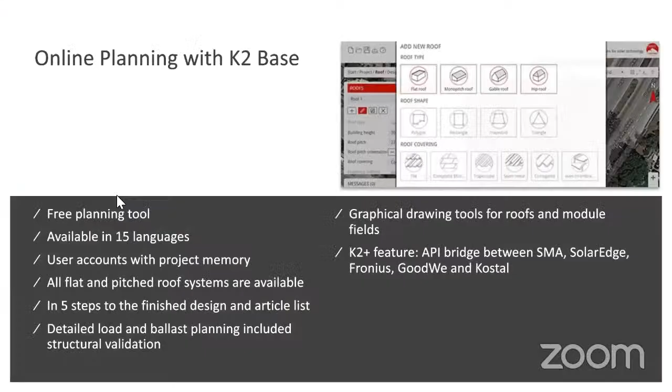Let me go back real quick. So I'll kick it over to David real quick here so he can give you some background on what GreenLancer offers.

Thanks, Nick. And thank you to everyone joining us today. GreenLancer, solar design and engineering made to order. That's what we're here to do. GreenLancer was founded to really accelerate the adoption of solar energy throughout the industry in total. Our mission is to make subcontracting solar permit design and engineering as simple and fast as possible for all the installers working on solar projects.

And how it works. GreenLancer is an online platform that allows solar installers to order permit design, engineering services, and other solar solutions from an on-demand network of providers, saving installers time and money. A quick run through: start by creating your account, creating a project within your GreenLancer account, browsing and ordering our fulfillment services, and then you'll have the ability to track and download all of your deliverables.

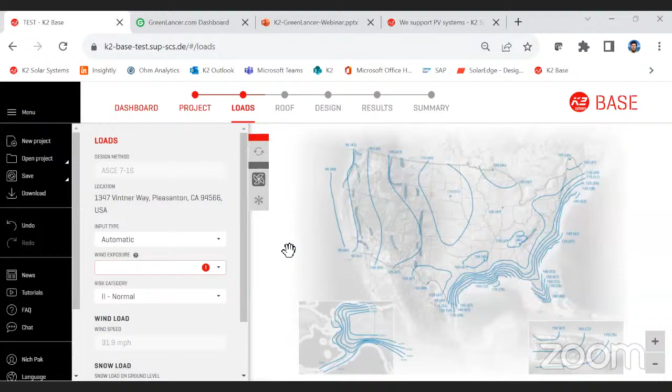This is the actual loading, wind conditions, and weather conditions that this array is going to encounter on this property. So it's letting me know it's analyzing if there's any snow in the territory. There's very little snow out here in Pleasanton, California—I think it snowed probably once in 1961 or something. The tool grabs weather information from the actual zip code, based on historical data. It knows the highest wind speeds in this area are about 91.9.

The one thing you do have to tell the tool is what kind of wind exposure this is. Is this house, where you're installing solar, out in an open field somewhere? Is it in a suburban dwelling with a lot of houses close to it? Is it near an open waterway? That gives you the classification of exposure, which in this particular instance is B. This is important information for David's side too—he needs to know where it is and what kind of wind exposure it's going to be.

After that, we're going to hit continue, and it takes us onto our next tab, which is roof. We're almost halfway to completing our project right now. So it's going to ask us while we're hovering over the property—let me zoom in a little further, just give it a second to zoom on in.

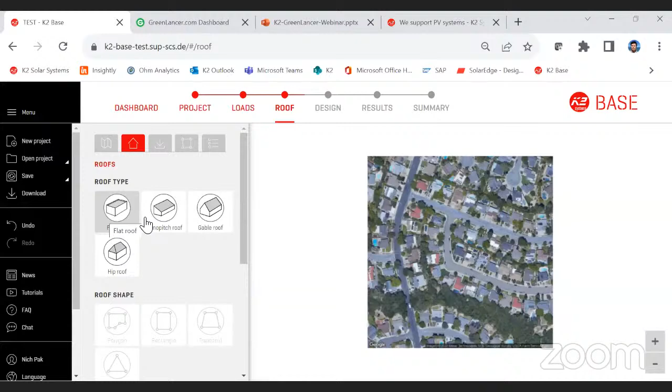It's going to ask me what type of roof we're doing here today. Are we doing a hipped roof? Are we doing a monoslope? Is it a very low pitch, almost flat roof? This is actually going to be a gabled roof. Let me zoom in here to the house a bit further—so this is definitely a 2-story house with a pool, and it's got to have an air conditioner.

Sorry about that, I was receiving a call from a family member and I thought it was on Do Not Disturb. Can you guys still hear me? Loud and clear. Great, sorry.

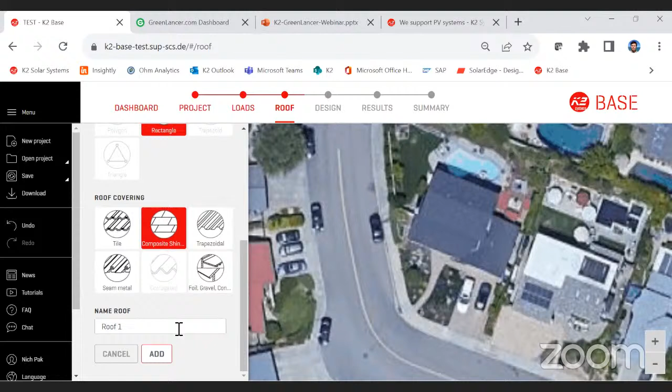Since it's a gabled roof, it asks would you like to design in the shape of a rectangle—what type of geometry are we going to put over the roof so we can fit solar panels into that? Let's go ahead and select rectangle, and then it asks what roofing material this is. Is this a tile roof? Is it a metal roof, a standing seam? Is it gravel or concrete or some kind of rolled material? This particular house is, of course, comp shingle. I think about 80% of all residential installs in the nation are probably composition shingle.

Is that what you're predominantly encountering, David? Yeah, that's what we see mostly. Yeah, it's definitely the most popular.

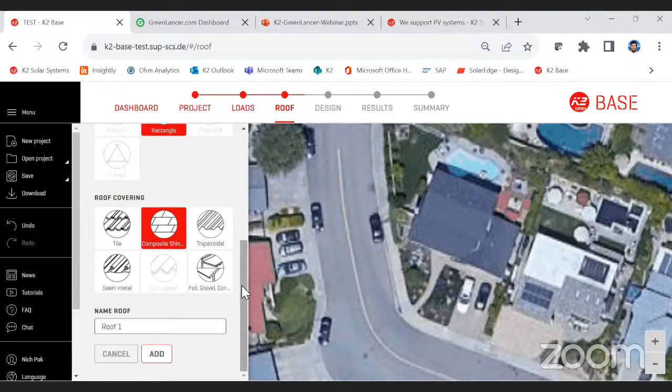I have the ability to classify what roof we're actually designing on, because we can design on multiple roofs with base. We can design on the southwest side of the house, or the southeast side. If you really want to, you can design on the north side of the house—don't recommend it, but we've had requests. So this one I'm going to title Roof 1, second floor. This way David will know which roof we're actually designing on, and he's going to get a comprehensive package of all this information over at GreenLancer.

Now you'll notice this portion of the menu has turned white, with no more selectables over here. But when I move over here, my cursor has turned into a crosshair—this means it's time to draw across the roof. So I'm going to click on the far west side of the house here, working from left to right, and I have inline dimensions ready for me. This is going to be about a 38-foot roof—we can just be right over that at 38, and then about 16 in depth.

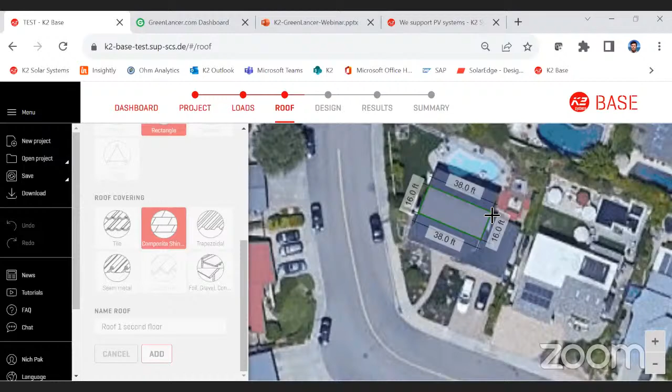There we go, and we can even zoom in further if we need to. It's going to ask me if I know the building's height. I do, it's not going to make any assumptions.

You can tell it that it's 34 feet, or you can say that it's 30 feet.

It's going to ask us what is the actual inclination of the roof, or the roof pitch. Most composition shingle roofs we encounter are in the range of about 22 to 26 degrees, so we're going to go with the higher one and say it's 26 degrees.

It does classify that the roof covering is composition shingle, and the rafter spacing here in the United States, mostly in the Northwest, is 24 inches on center. For folks on the East Coast, you probably encounter more like 16 inches on center because of more snow loading and different pitches out there. But in this particular instance here in the Northwest, we're going to see that it's 24 inches on center.

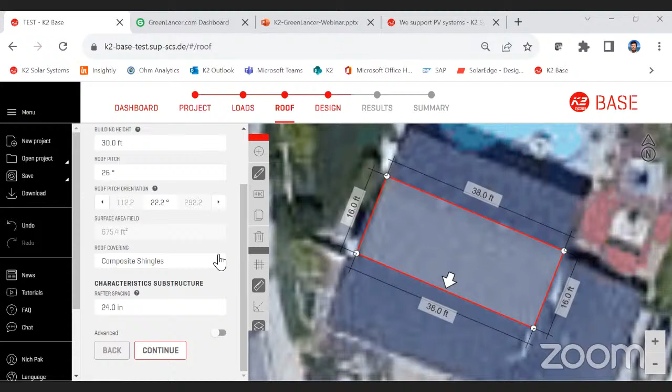So from that portion, you can see this roof portion is just about finished. It's going to lead us on to design very soon, so I'm going to click continue.

It's just giving me some other weather information right here at this last portion of roof, and this is where you can toggle through the separate roofs that you have. We're going to go ahead and hit continue here.

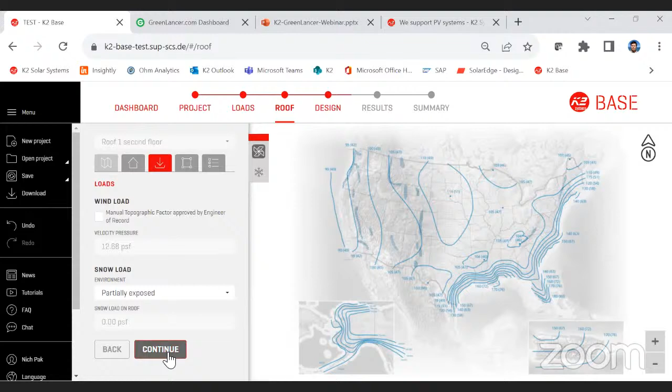We know that the environment is partially exposed. From here, if there are any obstacles like a chimney, a skylight, or roofing vents on the roof, you can stipulate that here, and you can even draw the size of it. That'll show up in the GreenLancer report as well, noting there's an obstruction and its size. We're not going to do that today because we've got a pretty wide open roof for this property.

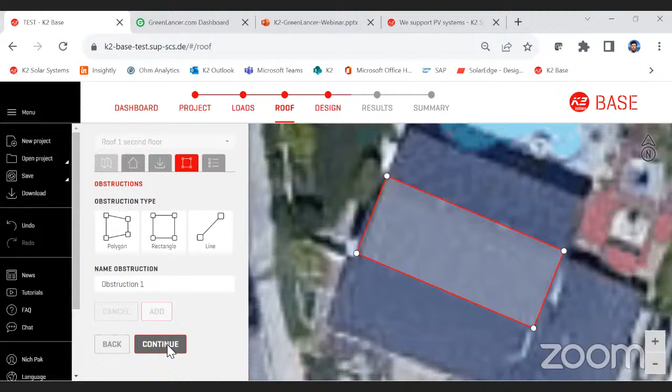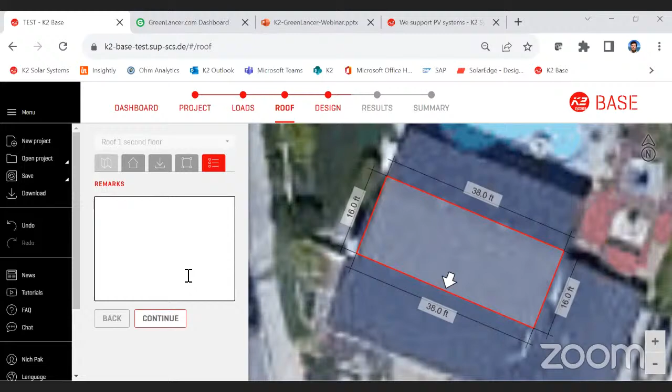I'm going to click continue. Any additional remarks about the roof? You can even put in here that the roof was re-roofed back in 2012, or re-roofed recently in 2019, if that information is available to you, you can place it right here.

From here, we're going to go ahead and select from our menu of modules that we have. We're going to go with the last module I used for my projects, which was REC, but we do have a vast menu of modules you can select from. It looks like the last one I used was the Alpha 360 Black. This will also give you the information on the module, its length, its width, its actual weight, and its power output. The power output will be calculated at the end.

It'll show you how many modules you have on that roof, and that's it for selecting modules. If you want to choose another manufacturer, just type it in - you want to select Solaria, you can select Solaria. We have a vast menu of different modules and manufacturers, which our compliance team is constantly adding to in this platform.

We're going to go ahead and click on continue. Then it's going to ask us, okay, we're finally down to system design - what type of system do you want on this? Do you want to use a standard 2-rail system where we put 2 rails under the solar panels across, or do you want to try our shared rail application as well?

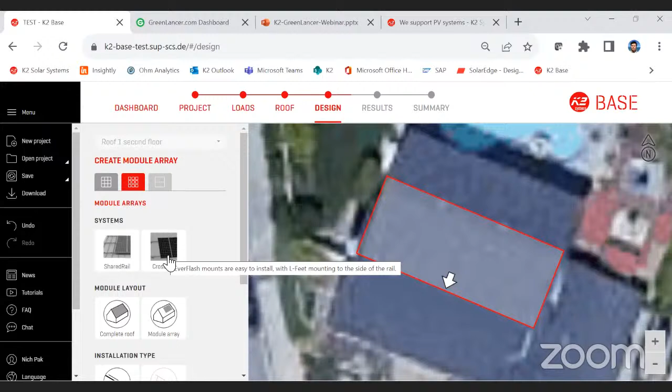For this particular practice, we're going to use the tried and true 2-rail system, where we put 2 rails horizontally across the roof and put modules across those 2 rails. But our system with Crossrail does offer a shared rail application as well. Please reach out to us if you have questions about how that's executed, and we can show you how it's done. We have more training videos coming with more comprehensive training about the shared rail process. For today's demo, we're just going to select standard Crossrail, since I think most installers and designers already understand that process.

It's going to ask me, would you like to just fill up this complete square, or would you like to draw across it? So I'll select module array layout. And what orientation would we like these modules in? I would like them in portrait.

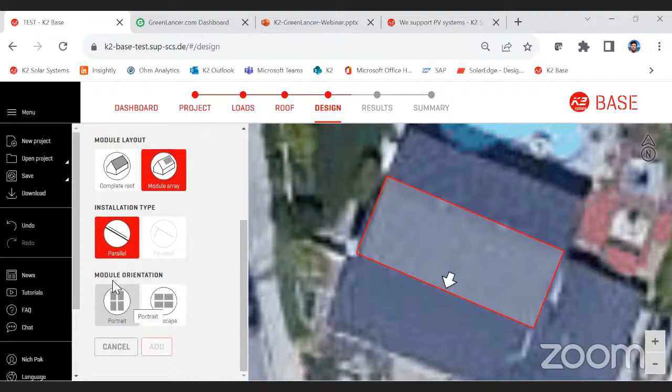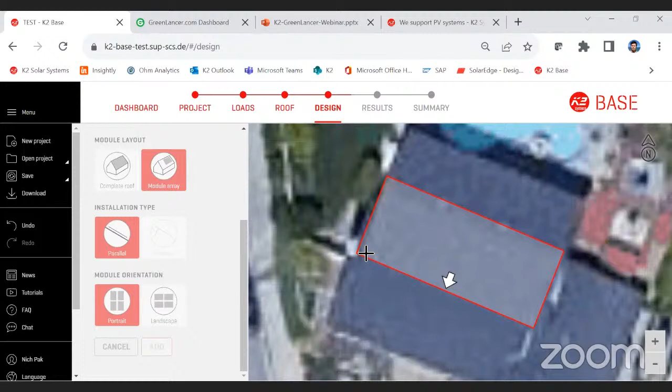Now from here, you'll notice the menu's gone white, and my cursor has turned into a crosshair. From here, I'm going to click from left to right and draw across the roof. This also gives me inline dimensions as I'm drawing.

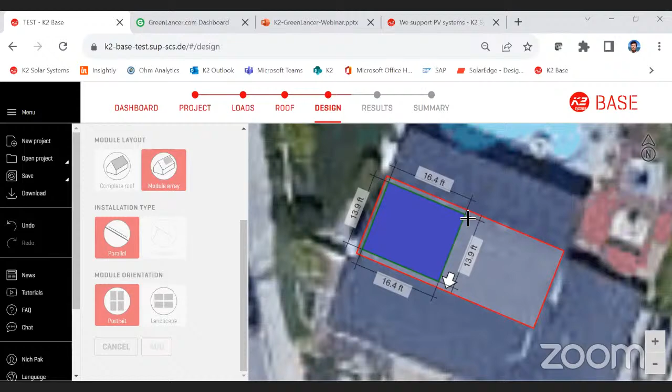So I can draw a column or a square over here, and it'll drop modules into that square. Or I can edit it and draw it all the way across, and it'll continually lay down modules as I expand that field. I'll show you right here how it's done. It's very simple, very plug and play.

It looks like we were able to get 20 modules up on that roof, a 7.2 kW system across this entire house, with plenty of room for setback. That's actually what your yellow line is here—it's an 18-inch setback all the way across the roof. So it fits right in that 38 by 16 roof. It's telling us how many modules we have up the roof, which is 2, and then 10 across.

From here, in this menu, you can select what type of clamps you'd like—our standard top-down clamps, or our Yeti hidden clamp. This particular client didn't want to see any of the hardware sticking out of the side, so he wanted the Yeti clamp. And since we're using black modules, we're going to make sure we use black mid clamps in between them.

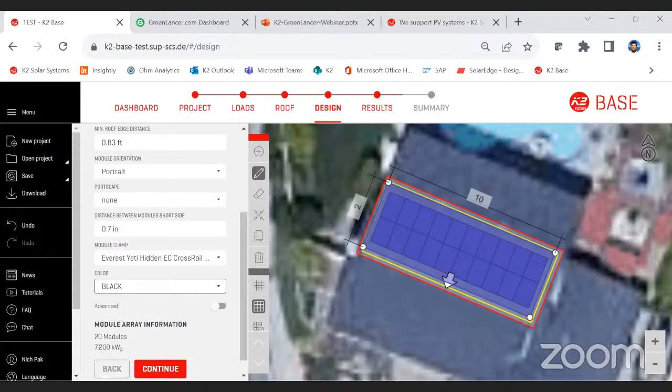From there, I'll click continue. We're on to our last two segments of designing this, and we're able to transfer over to the results tab. Since we've told the tool that it's a 24-inch on-center roof or rafter arrangement, it'll line this up with the rafter arrangement and place your mounts in between these areas.

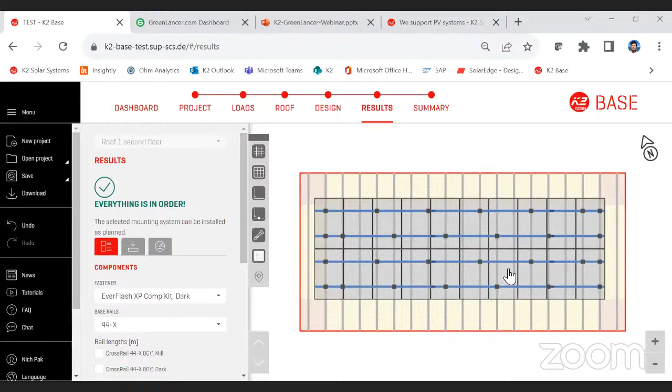So it gives you a readout on the actual array itself. We can select from our menu of different roof attachments—we have our E-comp series, our XP comp, and a standard L-foot. Let's say you're using somebody else's roof attachment today and want to use the K2 L-foot only. You can do that in this menu.

If we change it to a third-party roof attachment, you do have to consult with the manufacturer, because our tool would immediately recalculate for only 4 foot on center, since we don't know the capacities of that third party.

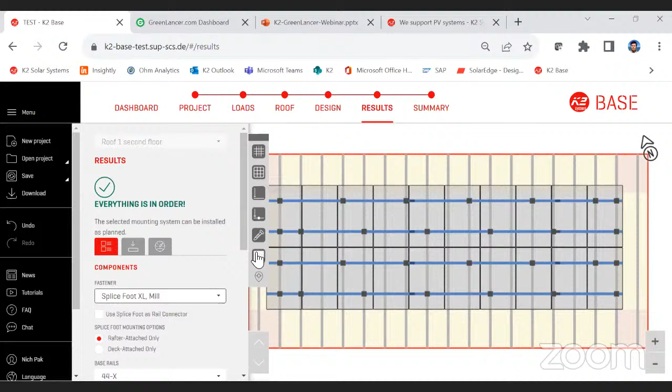But the one thing I'm excited about is we're going to choose the SpliceFoot XL. This is our brand new direct-to-comp and deck option roof attachment. It's compact, installs rapidly, and you don't have to break the shingle line like you do with traditional metal flashings. It's very fast and simple to install, and gives you the flexibility of joining the rail together in the field as a splice.

With that said, you can choose from an abundance of different configurations with the SpliceFoot here. You can use it as a rail connector, or as deck-attached only. For this particular issue, I'm going to use rafter attach only.

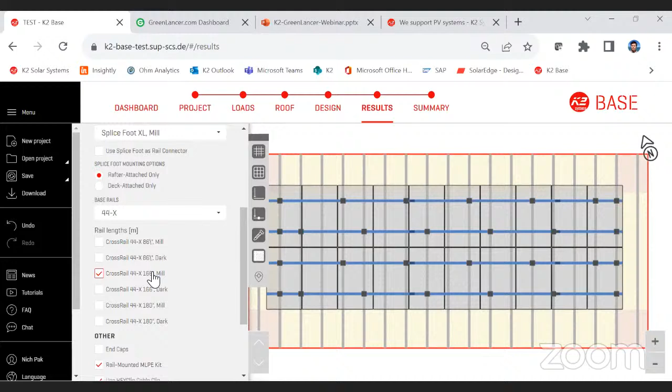I'm also going to select the rail I want to use out of this menu. I'd like to use our lighter gauge, but not lighter in duty, 44X in mill finish, since we're using black clamps on top. And I'll make sure there are good end caps on that rail, so no debris or critters try to get inside the racking.

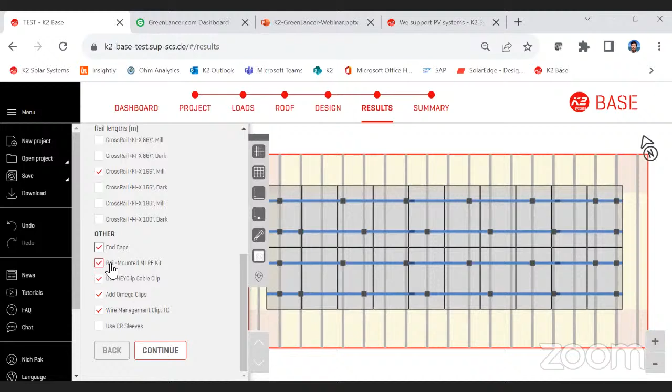From here we can choose our wire management. We definitely want a rail-mounted MLPE kit, which is great for microinverters and power optimizers. From there, I'll click continue.

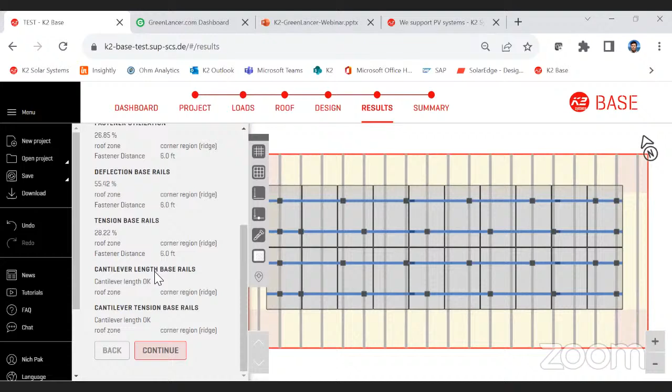It's letting me know that it's analyzed everything we've drawn up today, and we should be in good order. It gives a breakdown of some of the cantilevers, and this is all packed into your engineering report as well.

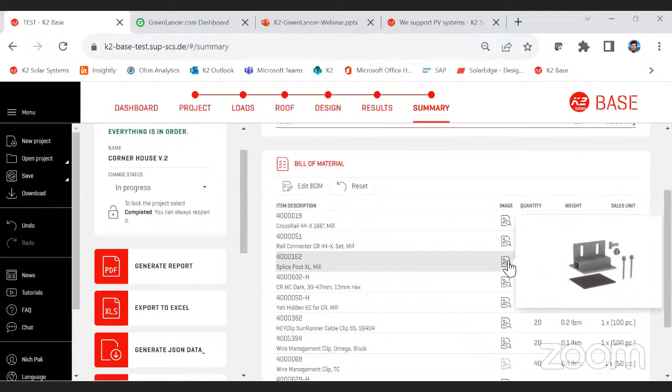If you're not familiar with what we offer, this is our Crossrail 44. This is the rail connector that goes in between. And this is the SpliceFoot XL with the integrated butyl water barrier built into the mount.

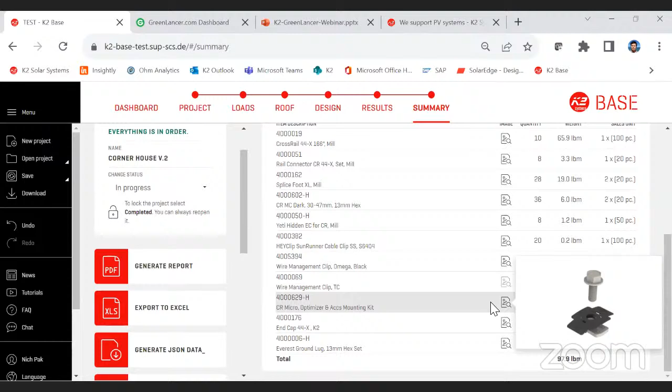This will show you the mid clamps. All of the imagery is here, so if you're unfamiliar with the product, you can hover over it and get a better understanding of what it looks like. We've upgraded our MLPE hardware kit to be a single bolt, and this is all part of a single tool install.

So you should only need one socket for this entire BOM for all of the structural attaching of the modules and the rail together. You will need a separate socket for putting in the screws for SpliceFoot because they are a different size. But everything else you'll need to attach rail, the T-bolts that attach to the rail, the Yeti clamp, and all of your module and rail attachment will be a single 13mm hex. So that's that portion of the BOM.

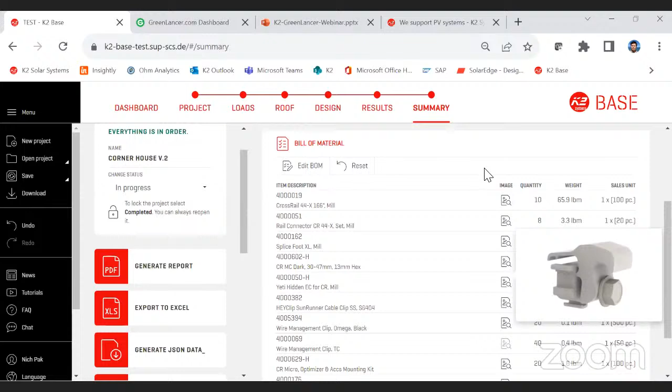Here's our kilowatt target, and I'll be able to hand it over to you right now, David, because we're going to go through our menu of API bridges here.

Standard report, where you can actually download this entire system, everything you drew up. It gives you an assembly plan, project data. It even gives you the length to cut the rail, so you can know exactly how long you need to cut it. It gives you the actual readout of that. We've packed a lot into this report, and we'll go over that later.

If you guys want me to send you this report, I'll go ahead and just download it. And then after that downloads, we'll go over to the other buttons we offer here. Last but not least, we have our software design button, which allows us to go over to SolarEdge and different APIs with K2+.

And then let's get this over to David. We're going to click the GreenLancer API button. Let's get this over real quick. It's noticed that I do have a login for GreenLancer. So if you don't have one, you need to make sure that you do. I also recommend having your GreenLancer account up on your browser. It's helpful, not required, but helpful to have.

If I hit login, it's going to recognize the project. And then from here, it's going to ask me what I'd like to have. Let's go over a couple of these real quick, David, and then I'll request one.

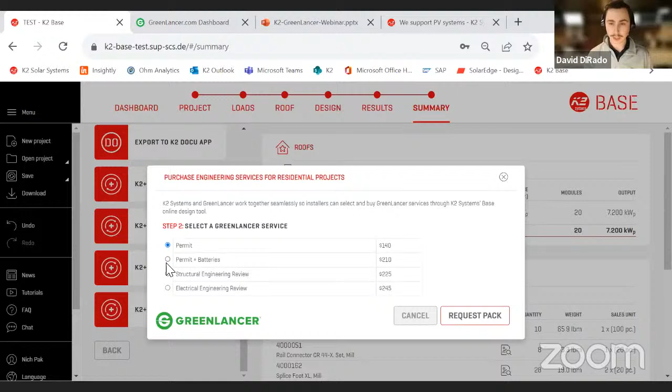Starting at the top, the permit—that would be your common permit plan set with all the structural and electrical sheets, spec sheets at the back of the full plan set. Permit plus batteries—we separate a traditional solar PV system from solar PV and batteries or storage. So that's where you'd get your PV plus storage permit plan set.

Going down into structural engineering, all of our engineers are licensed in any state that you're working in. So we're never going to hook you up with an unlicensed engineer. That would just be for structural engineering review, getting your structural stamps, and then on to electrical engineering review and getting those electrical stamps.

For this sake right here, to send this project on over to you, I'm going to go to request permit pack. And that will open up into GreenLancer, and I'll hand it on over to you. All right, that is sending its way over to our platform. I'll take over here, Nick.

Excellent, excellent. Thank you for the demo. Anytime I see the base program, man, it looks easier and easier to use. It's really amazing what you all were able to do. We appreciate that. Go ahead and take over, it's on to you, David.

All right, and everyone see my screen okay? We can see it, you're good. Okay, so we could see that project that Nick was just creating inside base.

It made its way over to our platform, the GreenLancer application, corner house V2. Right here, we could see that one quote Nick created, the $140 permit plan set service. As you see, I'm inside this project within your account. So if I went back to projects, I can easily come back and click inside that project. I have my quote sitting right there.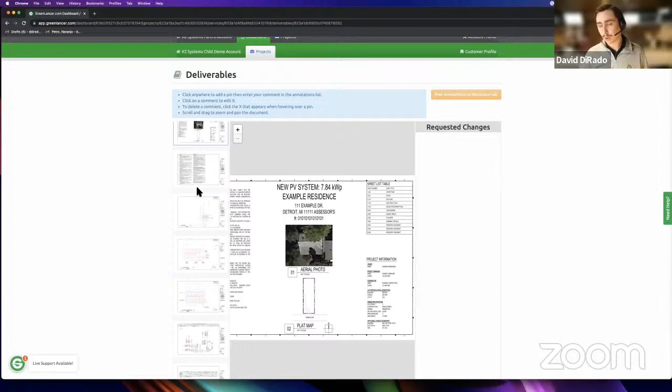One more cool tool that we have is right here - this would be your final deliverable. I can download it right here, or if a few things are maybe off, I can hit that eyeball, and this opens up our annotation tool. Let me zoom in a little bit here. So you can see on the left-hand side, this is a completed permit package, showing all the pages within this full permit plan set. And let's say on the site plan, I'll zoom in a little bit.

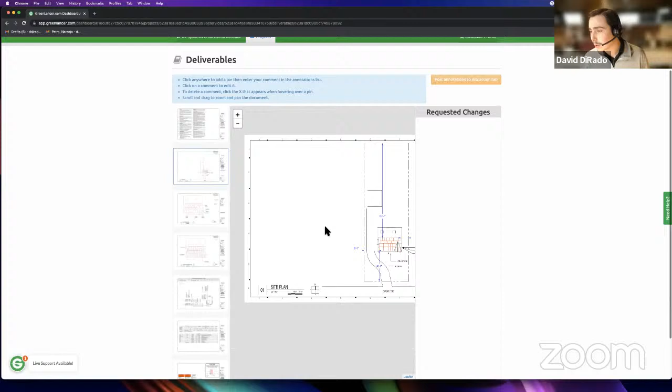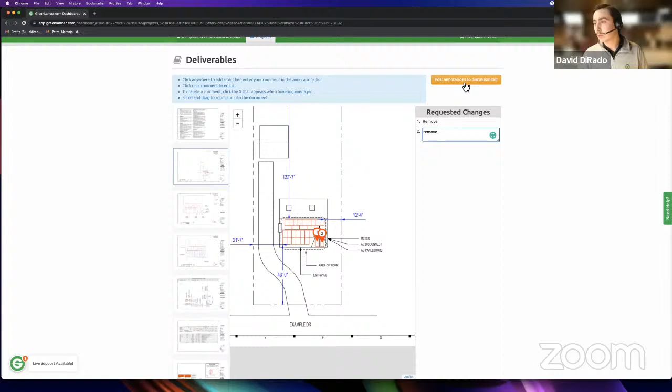All right, let's say I wanted to get rid of these two little modules - they're kind of out in the middle of nowhere. The homeowner didn't really like them sitting there, so we want to remove them. What you can simply do is click wherever you want. I'll click right on that module, drop a pin, and then write a corresponding message with that pin. And this one too - so I dropped two pins on the two modules I want to get out of this design. Now what I'm going to do is post annotations to the discussion tab, which builds your annotations and saves it.

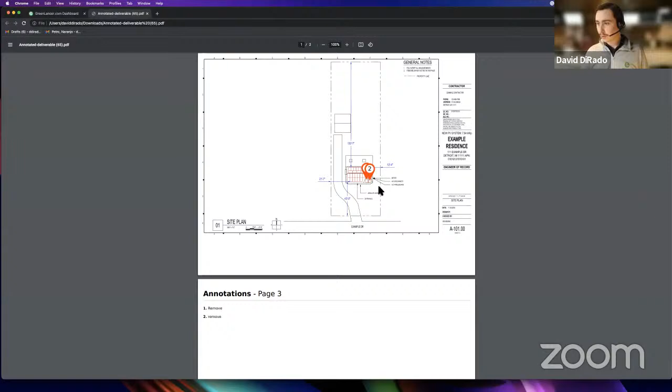Now, if I scroll down, you can see that I just left this comment, this annotation, for the designer on the other end. If I click on the annotation, it opens up, and you can see there it is. So it's a good way to get quick red lines out. If you want a few things changed, the homeowner didn't like the look of something, it's a really easy and simple way to get changes out to those working on the project.

So that would be a completed project. I showed you where that quote would come from the base program, right here, ready to go. And then, of course, if you want to add anything, you just click into that quote.

And then really quickly, just a few housekeeping things. The information, you could save all that so it populates. And then right on the other side, company, we can add your logo, customize your permit plan sets to your company every time.

And then we can set email notifications. So any accounting emails, we can make sure those go to your accounting department. If one person in your company needs to know when permits are back, we can set that notification. So when any work is completed, one individual or multiple will get an email notification that this project has been returned, and comment emails as well. A lot of times it's good for a project manager to have their email in here so they're aware and get alerted anytime a fulfilling partner reaches out on their work. We can customize that quite a bit.

Then users. We can always add users, delete users, and this is where we would add anybody new to the account that we wanted to.

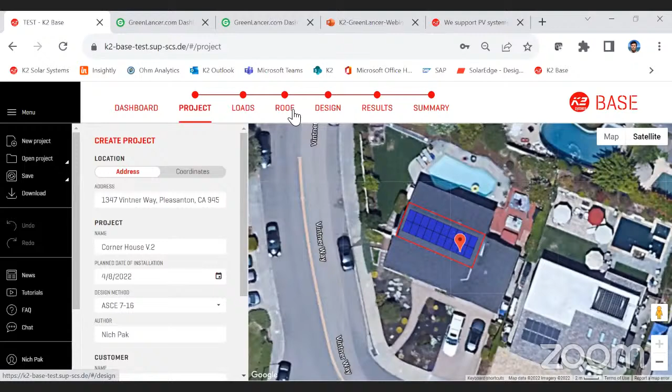Let me go to this project real quick, and I'll go back to the dashboard, and show you guys how to share a project. So here's our project that we were working on. Let's say for some reason I was stuck on the roof aspect or something like that. If I wanted support with this project, I would just click download, and I could share the project after downloading it. There's my file right there.

And I could go to our chat and get a hold of somebody via iMessage or WhatsApp. I could send them the file and say, hey, I'm confused on how to add another roof to this, how do I change the direction of the roof? We're able to respond very rapidly if you send us the project you're actually working on, or we can easily jump on a video meeting to get you supported.

That, and the autosave, and ASCE 7-16, and the API bridge we have with David and Jay at GreenLancer, are the four updates we wanted to show you guys, predominantly the GreenLancer partnership that we have. We're excited for it. Dave, thanks for driving through some of those features. I think let's open it up for some of the questions we have chatted in so far.

Yes, we have a few questions in here already. I'll start off with, how are the service levels different from GreenLancer and GreenLancer through K2?

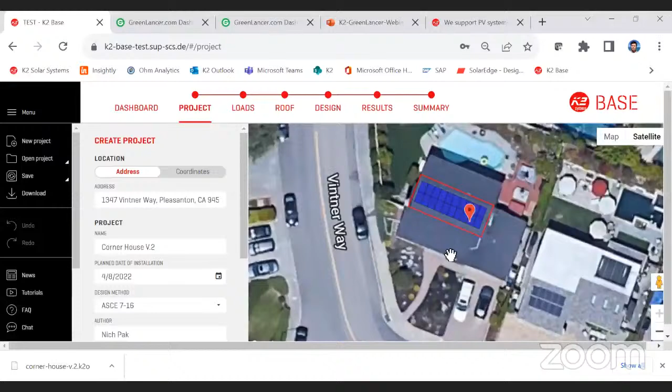Perfect. And then just piggybacking off of that, they also asked, is there any additional revision fee, or is it all included in the 140 price point?

That's a good question. So with the 140, I'll say this overall for any of our designs: if you get rejected at the AHJ level and they give you a rejection letter or any email feedback, we're never going to charge you to correct our work. That's just not right at the end of the day. Now, you may see a change order if we do a full design and then we're going to move that full rooftop system to the back garage - it's a pretty big change on the design side, so we might have a change order. But overall, if your permit ever gets rejected, we would never even think about charging you for us to update our work.

Revision fees are not something that we like to send out. We want to support our installers. So what do we have to do? Get you that support - that's what we strive for.

Perfect. And then Matthew asked, how do the setbacks work if you only need a setback along the ridge, or for flat roof NYC projects where the location of the 6-foot fire pathways can vary greatly? 6-foot fire pathways - wow, interesting.

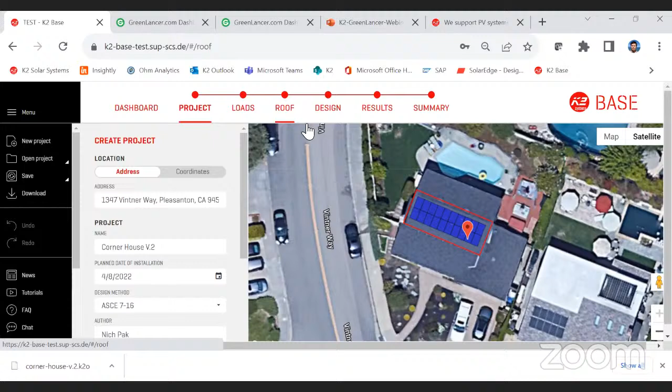So the easiest way to combat that is honestly just take the roof and place it where you need to place it. So you can modify this yellow line right here if you need to. But if I did know that I had a 6-foot setback, I would just change the dimensions of my roof that I'm trying to install on.

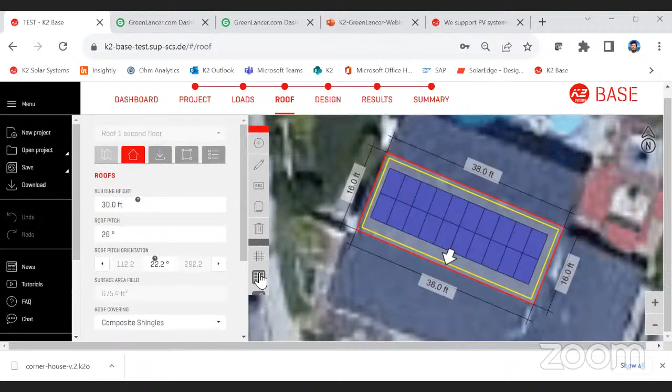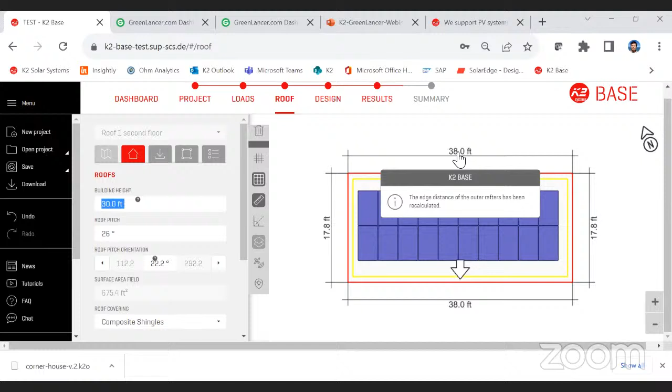Hopefully that answers your question. So I know that there can be a lot of complexities with roofs, and the design we're looking at right now is very rudimentary and easy to design. But the more complex that roofs are, especially with 6-foot setbacks, the easiest way to navigate that would be to just change the dimensions of your roof here. So I would just change that based upon knowing that I need a 6-foot setback in a certain area.

If you do, one of the better ways for us to support that, Matt, is for us to help you design the project and for us to get better vision on exactly how we can help you. Does that make sense? You can always reach out to us on the chat, and you can actually email us directly - our contact info is in the actual webinar.

Thanks, Nick. And kind of just piggybacking off of that question, how do you customize the roof setbacks?

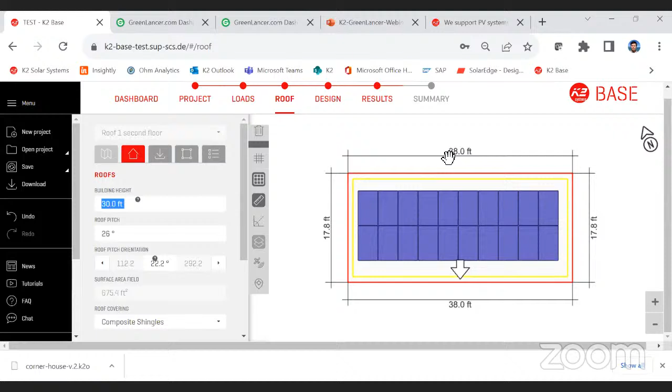It is actually down here, on this portion right here. Actually, might not have it here in the test version. I can take that one offline and show you how to do it. I actually don't have it on this version of the tool that is designed for our API bridge with GreenLancer. So I can show you how to do that one separately if that's all right.

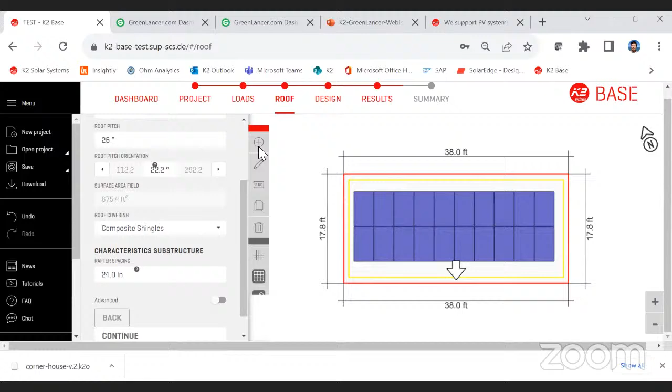Okay, and then who will be the point of contact on project questions? If it's structural and electrical, when I submit it through K2, will the point of contact be at K2 or GreenLancer?

If we have an ongoing structural or electrical engineering review through the GreenLancer side, the point of contact would definitely be that service and that discussion board within that service, putting you essentially in the same room with the engineer working on your project. Of course, we love getting phone calls here. So if you have a project ongoing and you have some questions, give my personal self a call or give our main line a call, and one of our reps will be available to assist, dig into that project specifically and help out.

Perfect. And do you guys only stamp the documents, or do you also assist with the structural independent engineer review?

Our engineering services are primarily to review the completed PV design and stamp off on the structural or electrical pages, whatever is needed. I'm sure we can help out with a structural independent engineer review. Maybe we could follow up offline, and I can learn a bit more about that and really find us a solution, which I'm sure we have.

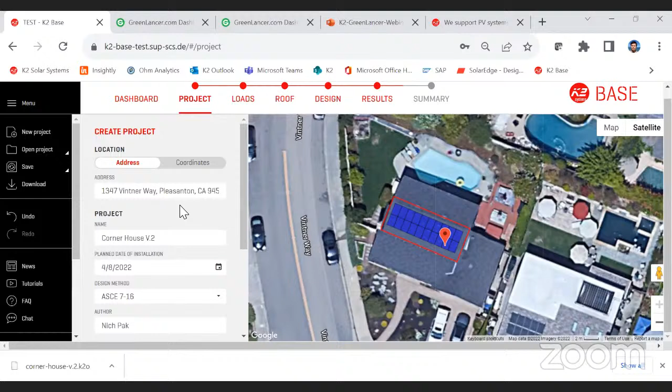Do you have the capabilities to design permit sets in New York City? The permit set requirements are much different than what is required in most jurisdictions. Short answer, yes. We have done quite a bit of work in New York City. I'm personally very involved with that state and market, so I know the ins and outs you have to go through there, but we're well versed and ready to take on those projects. I'm certain we can help. We've done it before.

Perfect. And the question everyone is wondering: when will this feature be live? We were driving the test tool today, which is already in its staging phase as of now. We're working towards releasing it beginning of April, maybe the first week. That is our goal, to have it live. So if you have a base login right now, you will not see what we just showed you, but if you wait until the beginning of April, you should see the GreenLancer button popping up there very soon.